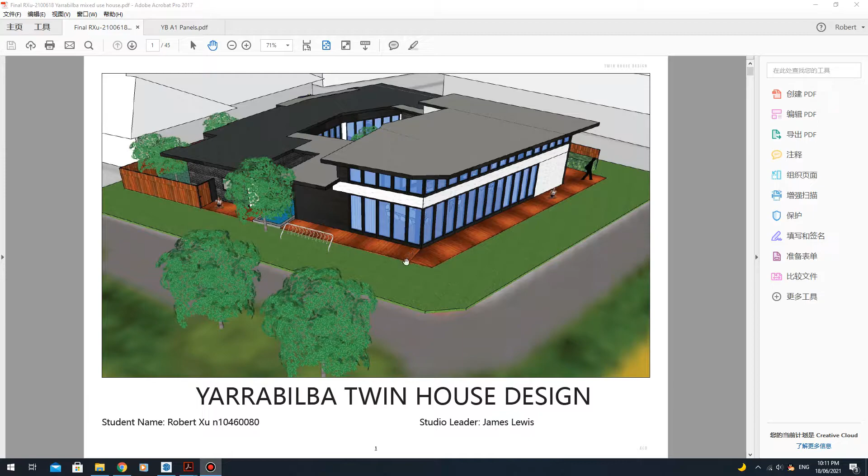Hello, James and Kirsty. Today I'm going to introduce the Yarrabilba twin house design.

Within the 15-minute city and circular economy, all the facilities and the community need to be self-sustainable, meeting community needs, products, waste and recycling circles, and personal needs for all different kinds of space for a multi-generation house. Everything needs to be located within the Yarrabilba community.

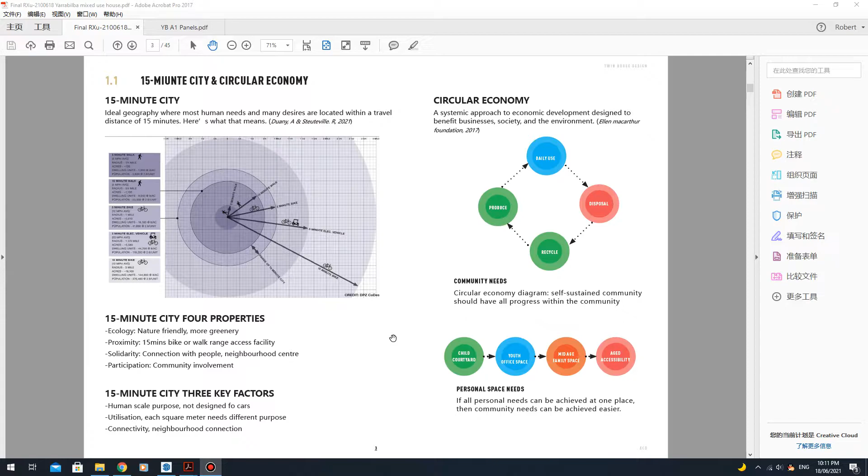The community spirit is interpreted as people from four directions: north, east, west and south. They all gather together at a meeting place to sing a song together. So with the Yarrabilba symbol and a place to meet, the place needs to feel like a home, with respect to the nature and Queensland Sun State.

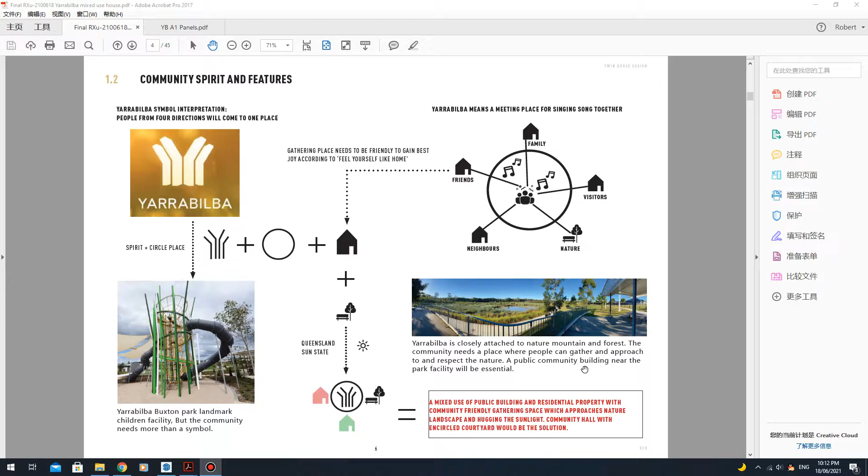It works out the building needs to be a mixed use of public building and residential property with a community-friendly gathering space which approaches the nature landscape and hugs the sunlight. In this case, the community hall with an encircled courtyard would be the best solution to respond to the 15-minute city and the circular economy.

The concept statement: Yarrabilba twin house, a mixed-use scheme that can provide affordable, large multifunction space with residential property, and a sunlight courtyard placed at the back to make the place feel like home comfort. That will help both community and residents achieve a unique work, live, play lifestyle within a self-sustained, social and environmentally friendly community.

So basically all the concept development is from the previous page, and the concept reference image is from the work, live, play lifestyle. In addition, for the sun courtyard, I've borrowed inspiration from Siheyuan, a symbolic Chinese traditional architecture. All those buildings actually encircle the courtyard, whether they are tenants, merchants, or the house owner itself, which is useful to understand the mixed use case.

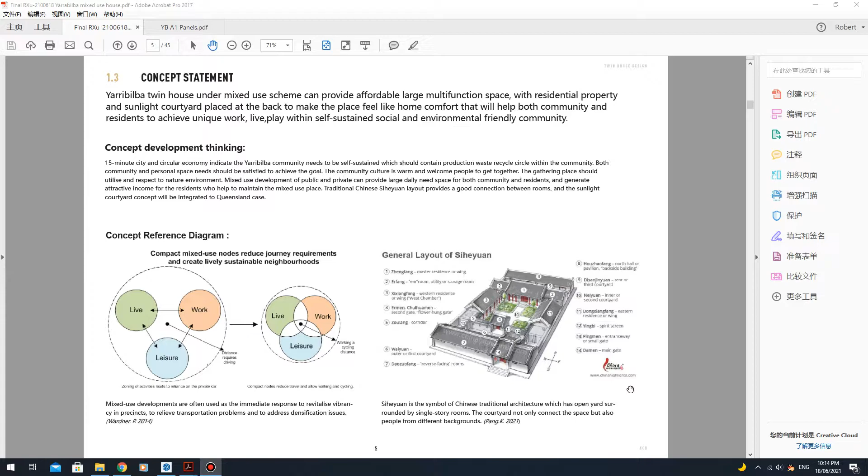The concept development, as you can see from the previous page, I have developed the private and public space with the courtyard in the center. Once it got the Yarrabilba symbol deformation following the Yarrabilba symbol, I balanced the public and private space to make it even, with the timber deck connecting both public and private space, although they have a defined border.

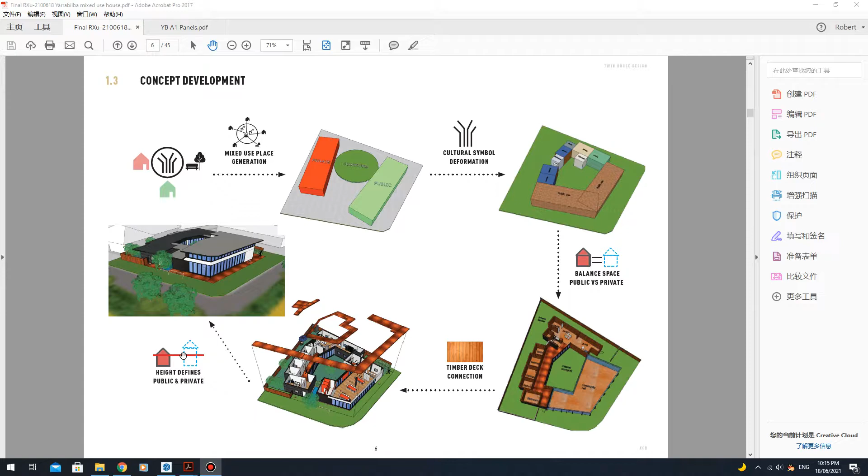In order to define the public space, the community hall is slightly higher by 1.5 meters than the private property, to show people that's the public place, that's where people should go.

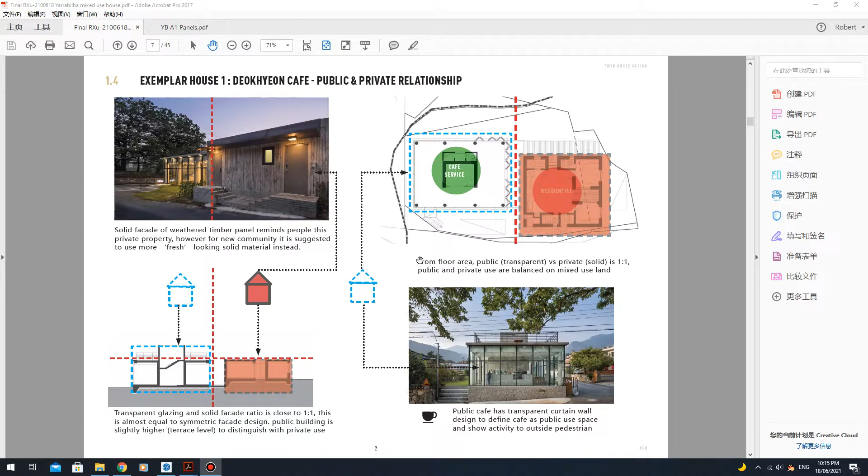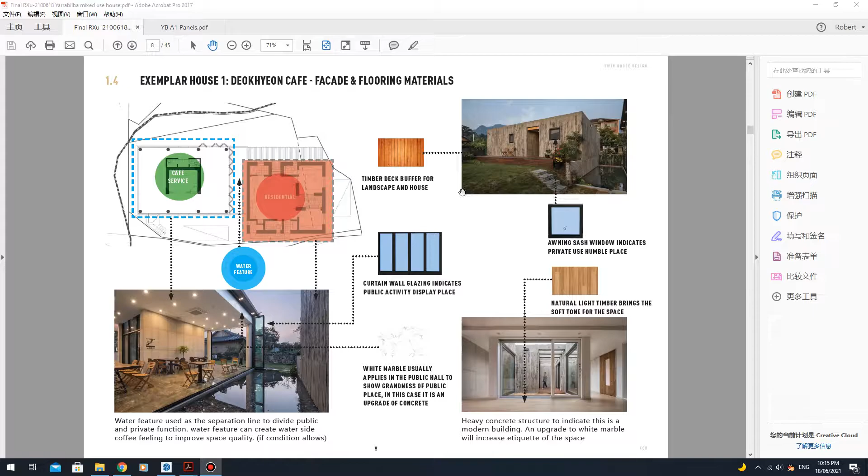So I've used three exemplars. The Deokhyeon Cafe shows that the private part is solid and the public part is curtain wall glazing, with the private and public floor plans having 50% equal floor areas. You can see the windows for public space and private space differ in size, and the timber decking, which I've applied under Queensland context.

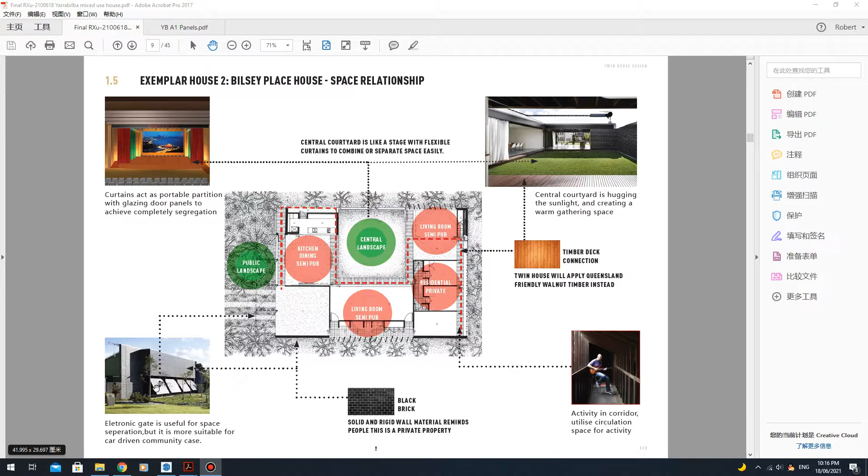The second one is the Bilsey Place House, showing the relationship. As you can see, the whole big space is connected and circulated through the timber deck, and those places use curtains and partitions to separate or join space to form a giant place. The circulation space can be used for music, leisure activities, sliding electronic gates, which is more helpful for a car-driven community, which is not the case for Yarrabilba.

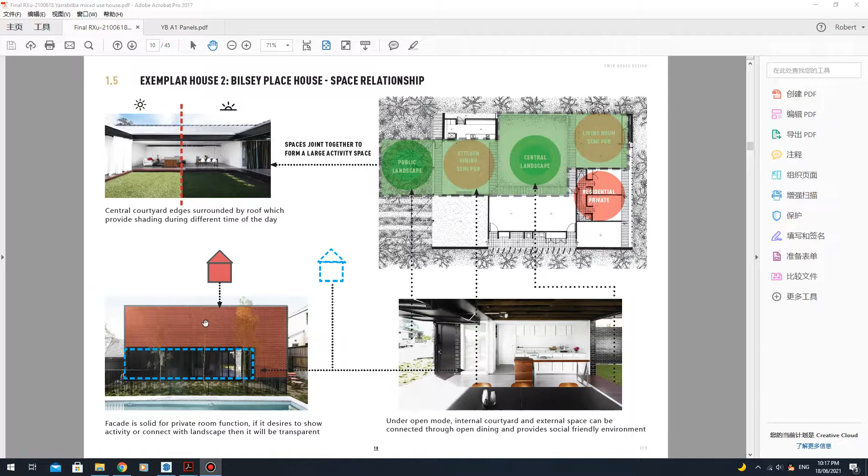For the sun courtyard, the shading structure from the building will provide shading during different times of the day. Once the door opens, this can connect the external space, residential place, and the internal courtyard into one space. The spaces connecting to the landscape will be transparent, and the private part, which doesn't want people to see, will be the solid part.

For the community functions, I've applied the Curra Community Hall. As you can see, people still use the timber decks as a buffer between the external landscape and internal space. It's also timber flooring, which is elder-friendly, and the timber flooring will be slip-treated so no one falls over. As you can see, the entry is pretty high, and once it gets to the internal space, it gradually gets lower.

And the view for the external place, once it's opened up, it will be getting a view to the public landscape. For the Yarrabilba case, this will be the Neumann Park.

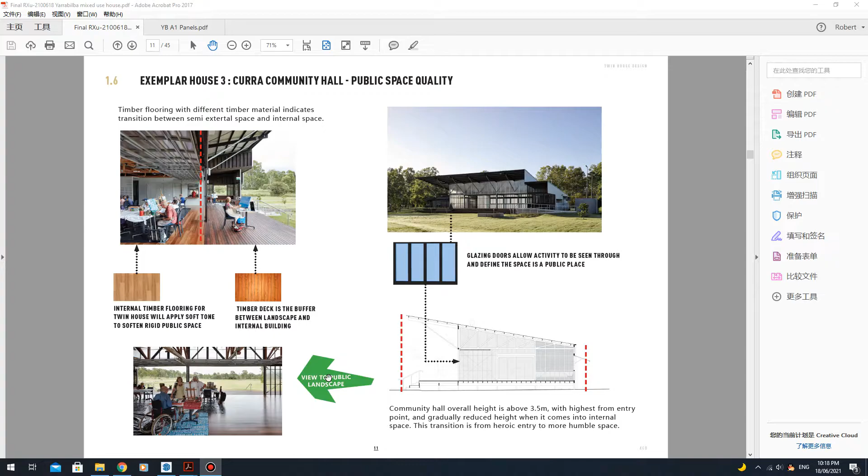The public functions, as you can see, the community hall is pretty much a multi-function hall. It can be used for education, entertainment, work use, conference, shared office, functions, weddings, parties, special events, exchange marketing.

Community use exercise. For the Yarrabilba community, it's got a circular economy where people grow food in their backyard. If they have excess food, or want food from other families, at the weekend the community hall in the twin house will open for residents to exchange stock. This will complete the circle of the circular economy.

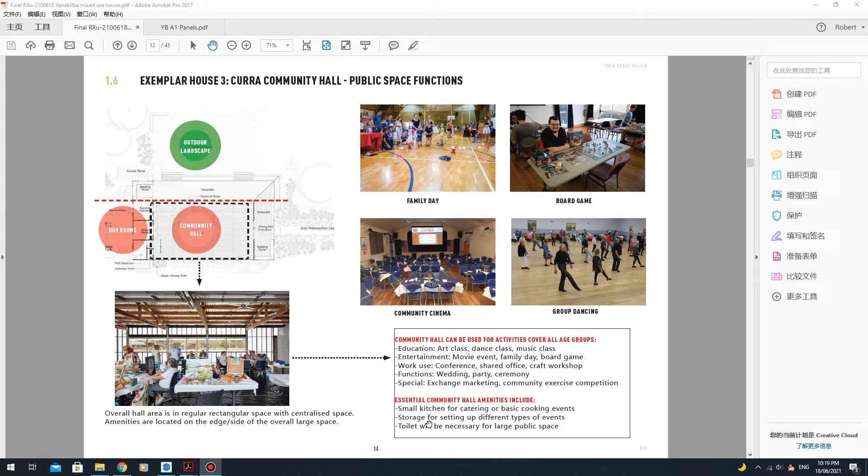And the basic needs for the community hall, a kitchen and storage, that will be helpful, and the toilets definitely for large events where people need to solve their problem.

The design analysis, as you can see, the Yarrabilba community got small covered place, small enclosed space, large uncovered space. But for the large enclosed space, they've got a place in the community, but it is not really price friendly, because it will cost like $200 per hour from the local hotels.

So the Yarrabilba Twin House Community Hall will be the community-dominated use and with reasonable price as well.

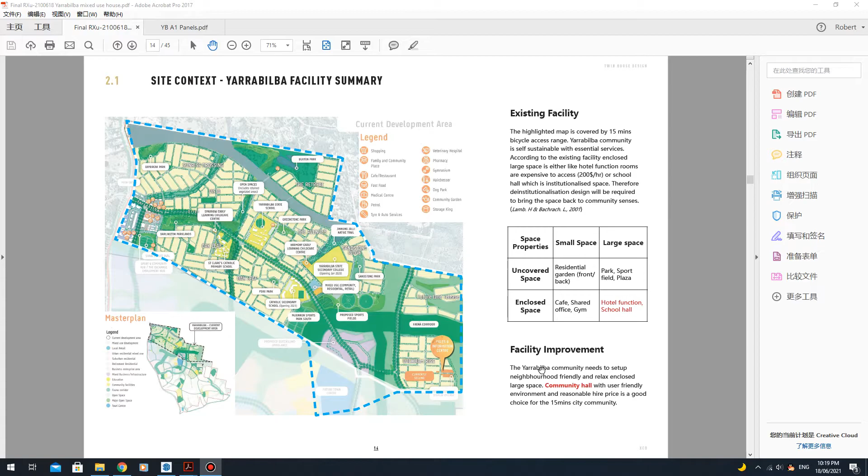As you can see, the 15 minute range, all these blue lines will cover the foot range, and the big one will be the bicycle one. Basically, the all current Yarrabilba community will be covered in the 15 minute bike range.

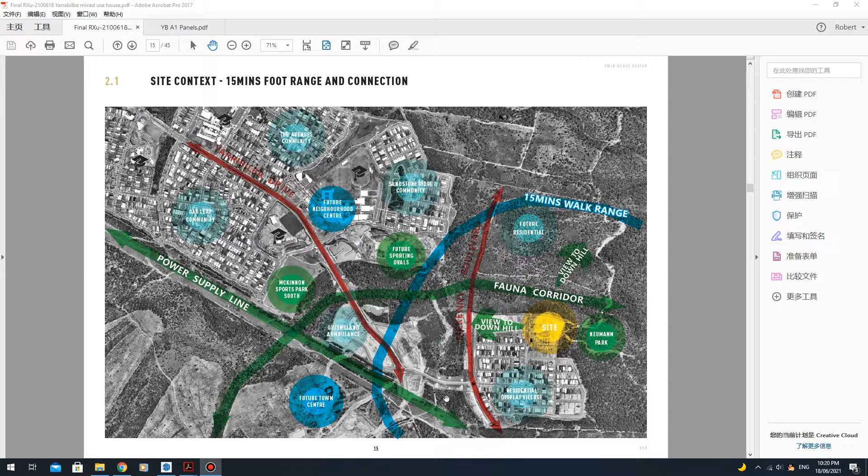And that's the site views. And definitely the landscape view to the Neumann Park should be also the one for the public as well, so that's where the public one should be located.

I've tried three options, but which will be self-explanatory on my design brief.

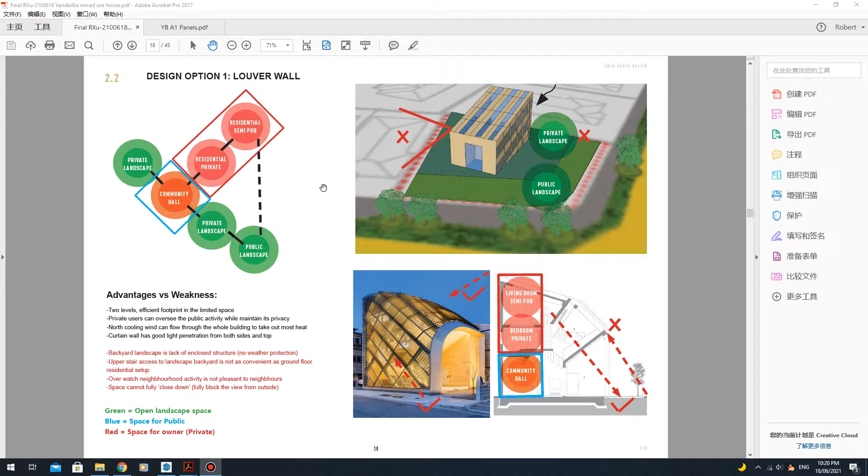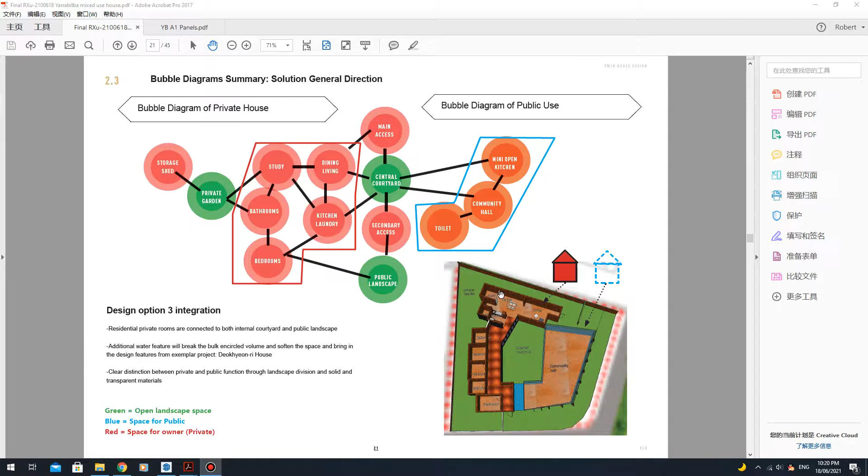So after I work out the relationship, pretty much the public landscape, and also the private, and another private landscape for the residential users if they want to get a retreat and keep away from the noise of the public.

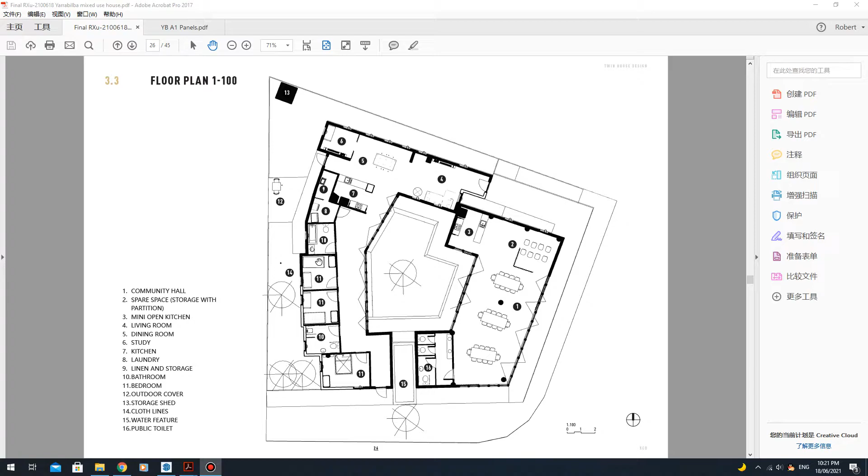So as you can see my site plan, and that's the roof plan where the roof materials are slightly different to distinguish between the two spaces. And the floor plan is pretty much self-explanatory, and that's all the flooring materials.

As you can see, I used soft oak timber for the internal and also the community hall space, and the timber decking connects all the exterior and interior space.

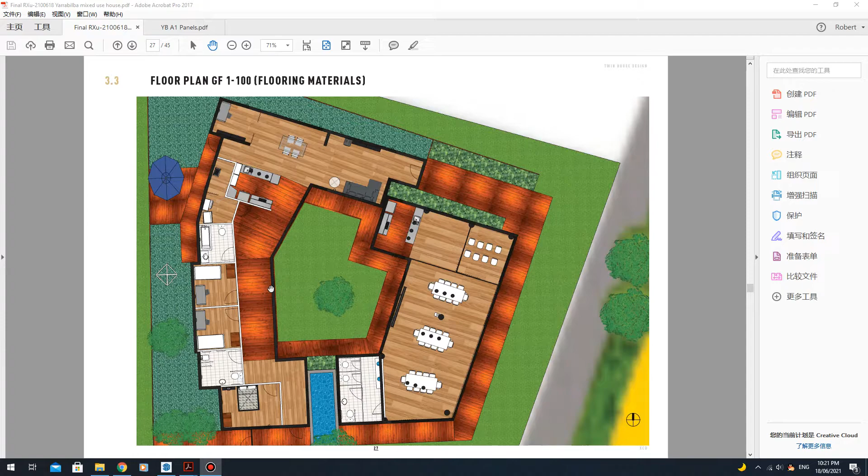As you can see, the circulation when residents come home: they drop their stuff in the bedroom, take a shower, and go to the kitchen, cook a dinner, and have dinner while watching the internal courtyard view.

If they want to have some home theater late at night where no one uses the community hall, then the community hall will be a home entertainment place for them.

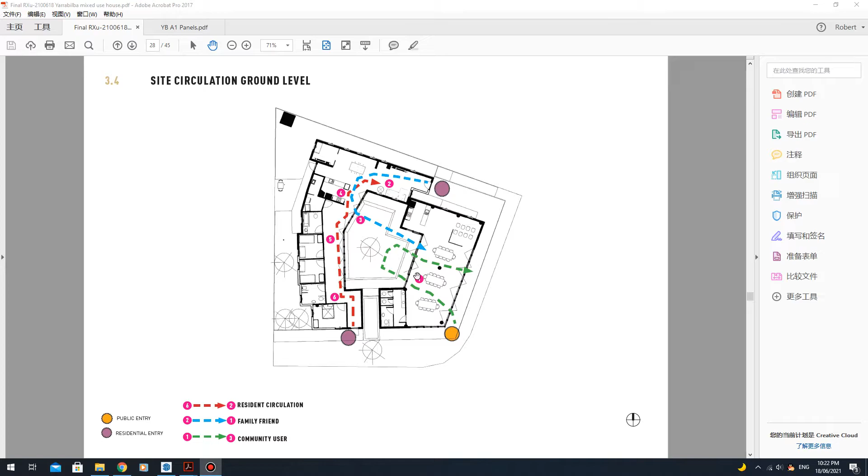As you can see, the community hall has 4 modes. Daily use mode, which is for all different activities during the day. Completely family, large events for the residents, which is the benefit.

And also neighborhood friendly, if you want to invite the neighbors you are familiar with, so they can access part of your family space. And if you want to open up a large community space, that's for like a stock exchange, then you can just open up and close part of the internal road, which will not disturb the public use as well.

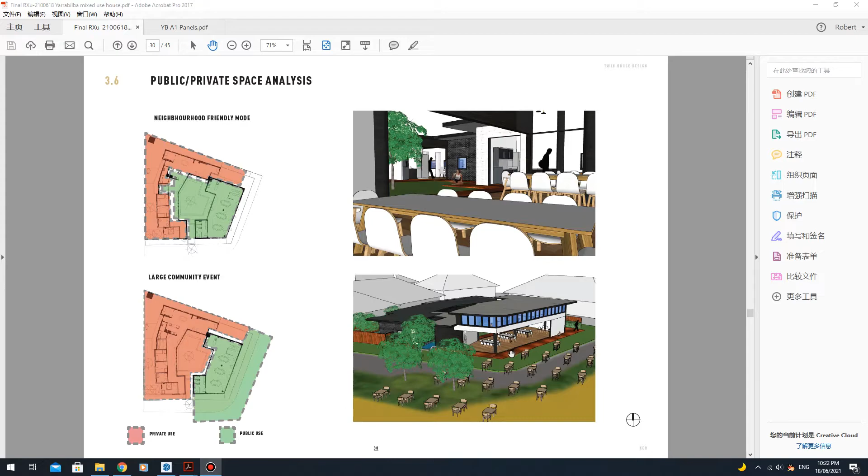So external perspective view, and that's the facade material: black brick from the black house, timber flooring deck, curtain wall, the dark aluminium. This is the transition between the black brick wall and the public space.

So this one is the toilet, which still indicates like an undesired place. You don't want to attract people to come there.

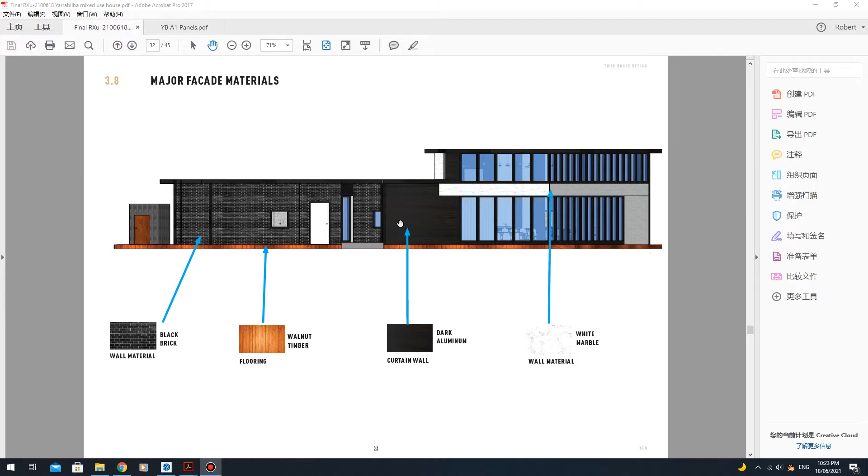And all the sections. Internal floor plan where you can get the projector.

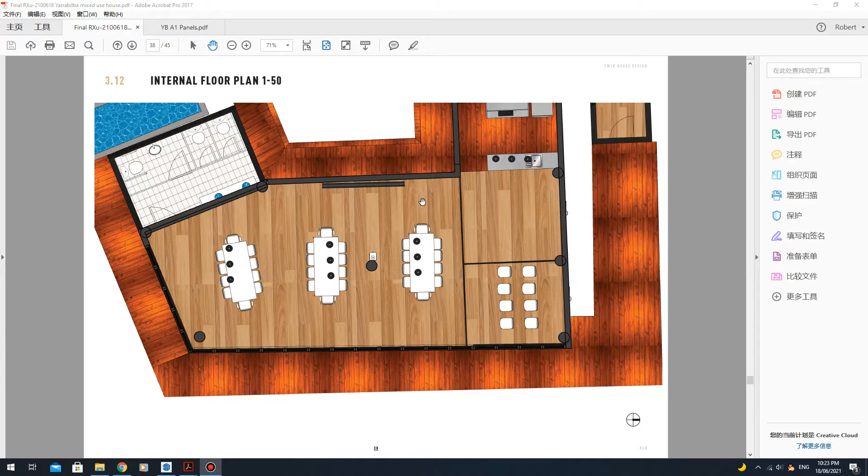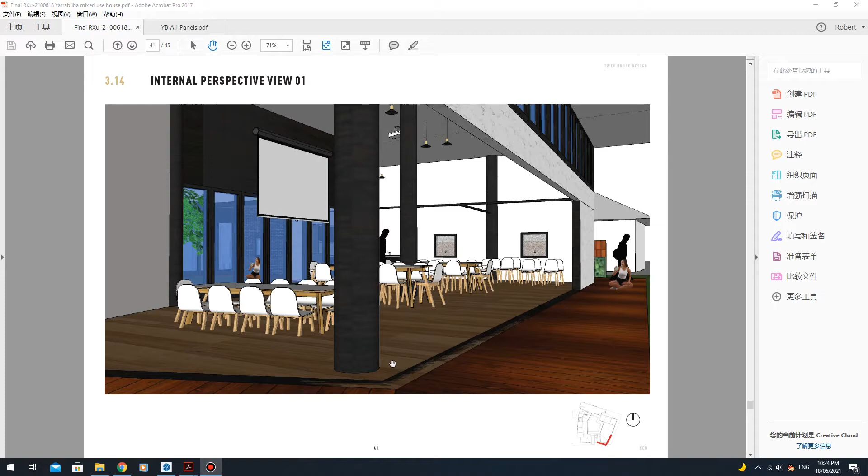So where you're standing on the deck, if you want to have a look at the community, that's the view. The courtyard, once it's open, standing at the kitchen.

So all the other views are pretty self-explanatory. If you want to say hello to your neighbors, you can stand in your premises and do a big greeting, it's pretty casual. If you want to invite them closer, there's plenty of space for you to use as well. And a pretty harmonious space once you enter the residential entry.

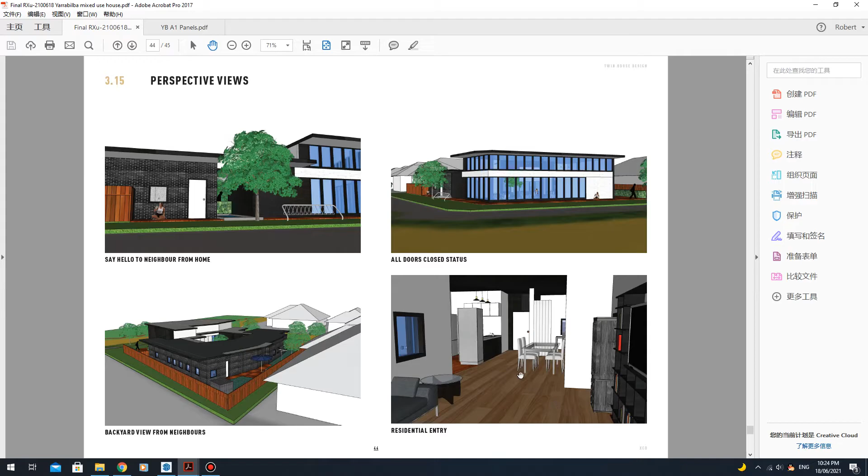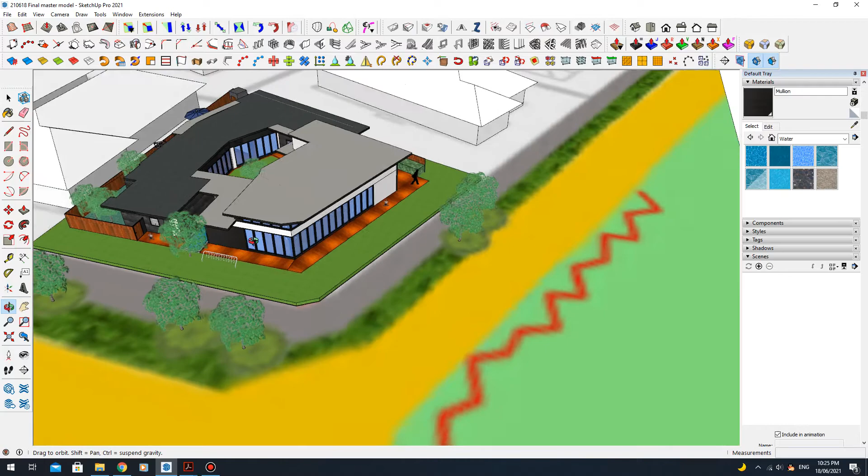So for now, I'll show you running through around the model for you, so you will get a bit better understanding of the space. So literally I got some buffers, almost like should be almost 4 meters. So this will actually get the maximum use of the space.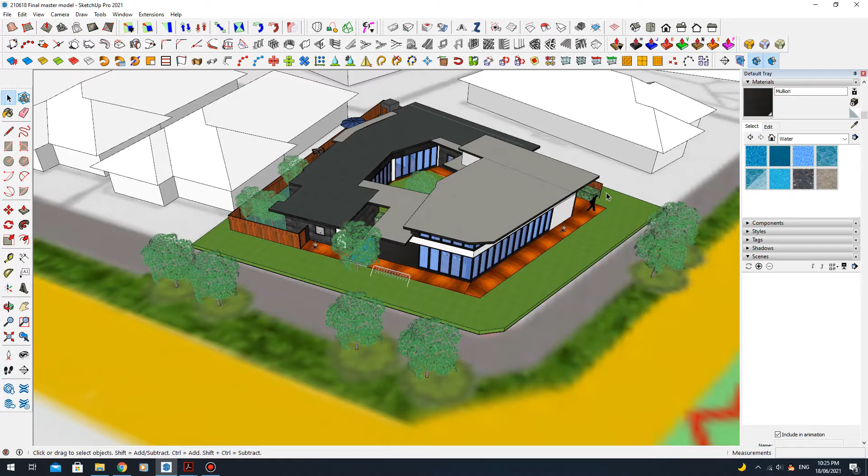So the backyard, which is slightly a bit closer as well, will be around probably 2 meters to the other property boundaries.

So you also got the bicycle racks, because this is the 15 minute bicycle drive community. So you can park your bikes around here.

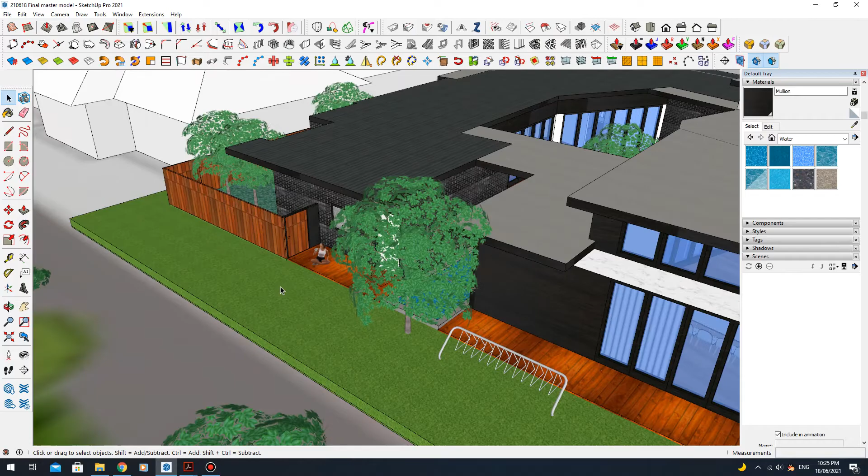So where people want to enter, they can enter from the public entry. The residential one, as you can see, stops people coming in, and also has a tree to cover a bit to the internal courtyard to get some sort of privacy. But if they want even more privacy, they can install curtains down here, so that will be really easy to install and affordable as well.

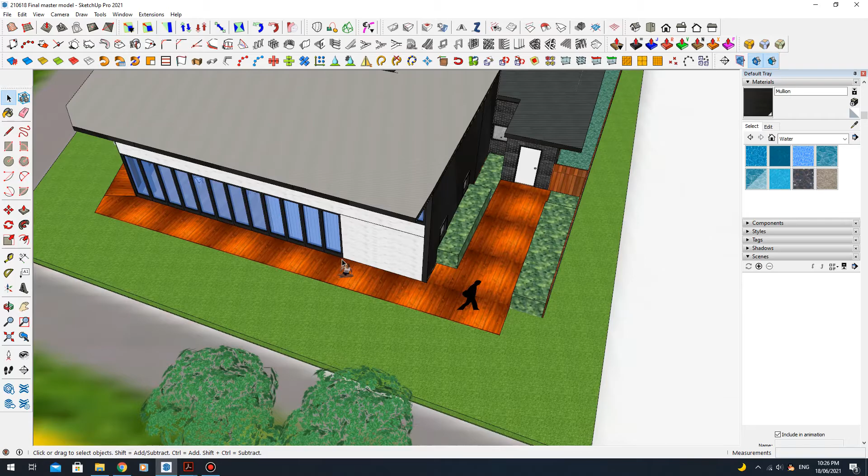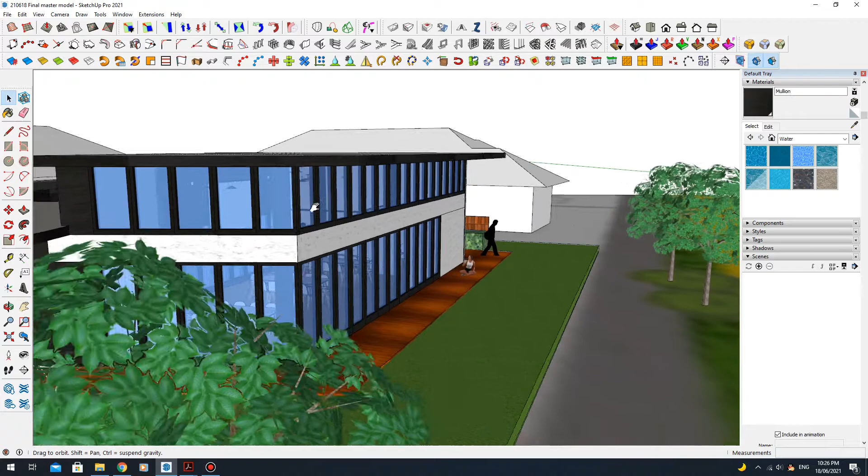So that's another residential entry. So for all those undesired places, I'll use mosaic glasses and transparent ones, the 4.5 meter high community hall, which will get pretty good light penetration, especially early in the morning from the east sun.

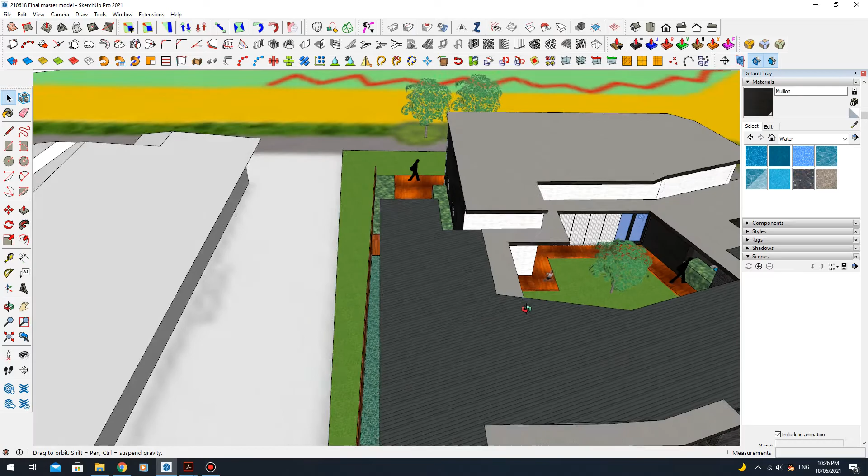And this is the view towards Newman Park. So they got a retaining wall down here as well. So for now, that's the internal courtyard, and a bit of a back retreat space, clothes hangers, and also a shed as well.

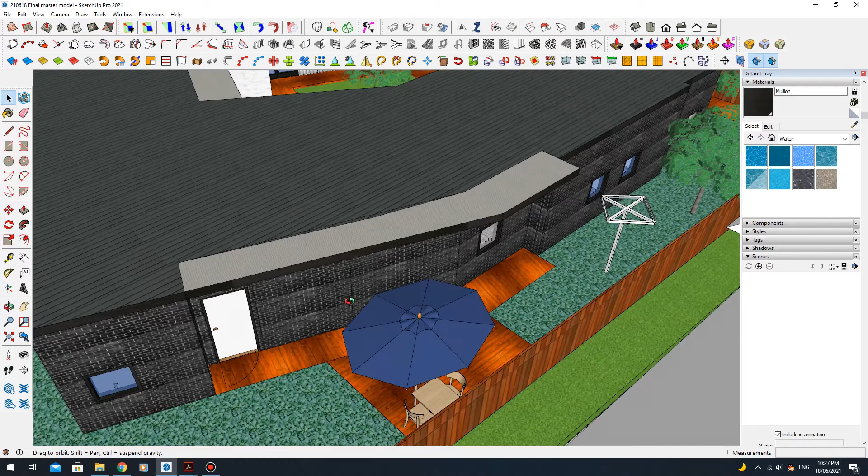The study will get a bit of a view of the landscape down here, which needs the landscape consultants to get a bit more modifications. All those back circulation areas will get timber decking for the external area. And this also has the entry from the front door to enter the backyard, which is easier for them to get the rubbish bin out to the street.

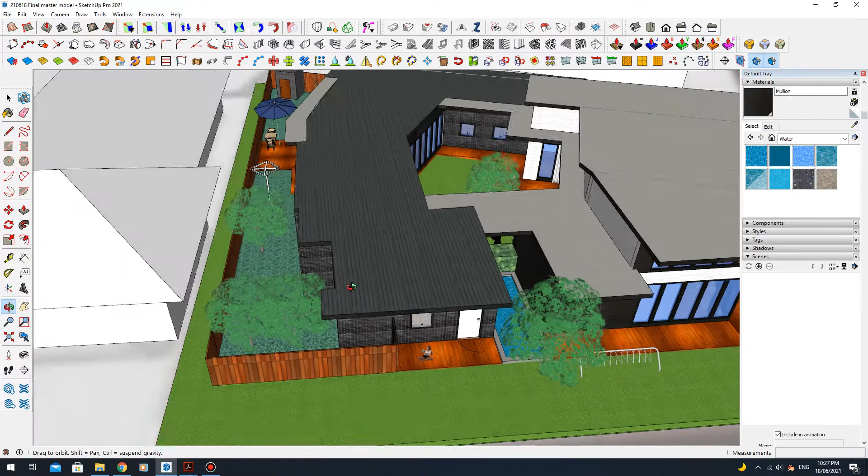Now I'll open up the internal space. I actually got 2 bathrooms. Those bathrooms are actually accessible for disabled persons, so definitely this house is for multi-generational living.

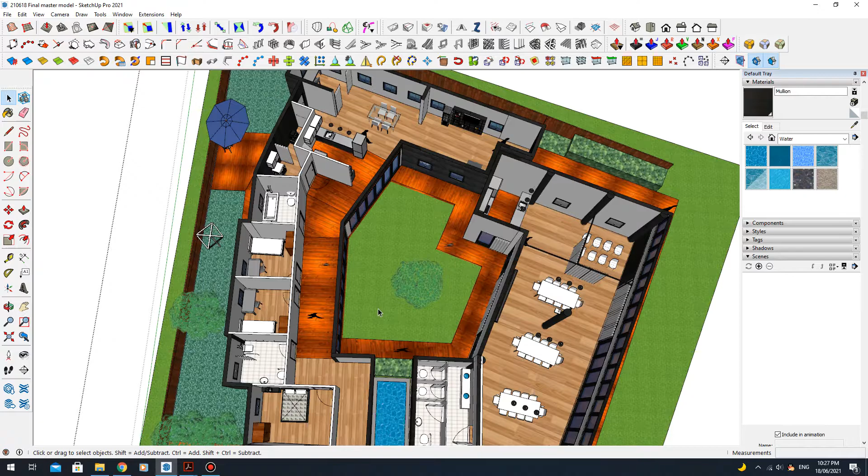They got a courtyard for the kids, and they also got a working space for the youth, and for the family there's plenty. And for the aging ones, all those timber decks got some kind of slope to the ground floor, so the wheelchair can easily access.

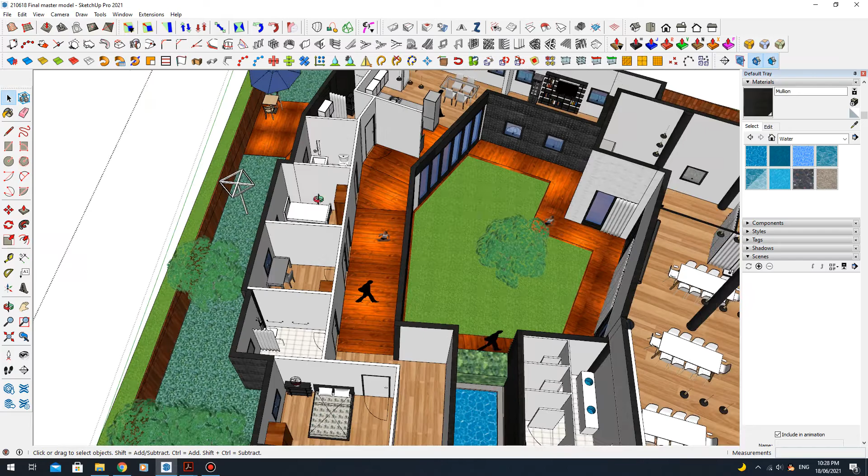All the kitchens got task lighting, which is the highest standard from the Livable Housing guidelines, and the bedroom is platinum standard as well.

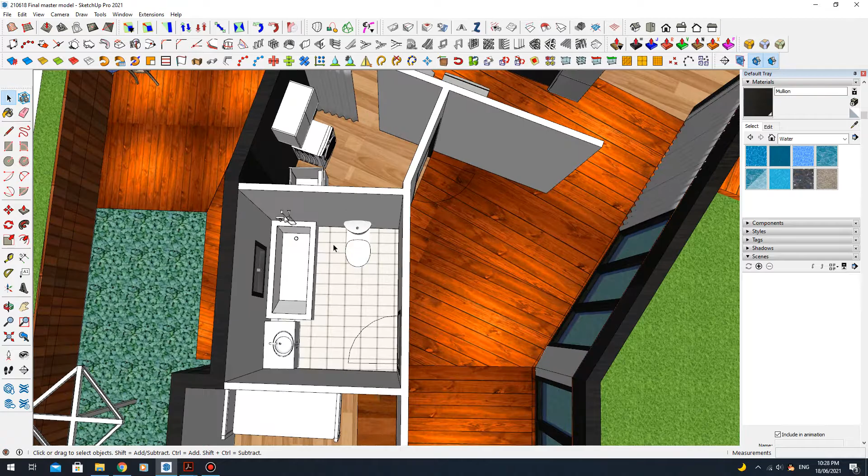Study room, I put it for a single bed, which is a pretty standard 3x3 one. They also got a second bathroom if they want to use for showers and bath, a combined one to save space. And also you got the laundry, general storage, and the living room, which is at the entry.

If you want to have a look at the kids, you can just stand up from the sofa, the lounge, and have a look at the internal courtyard.

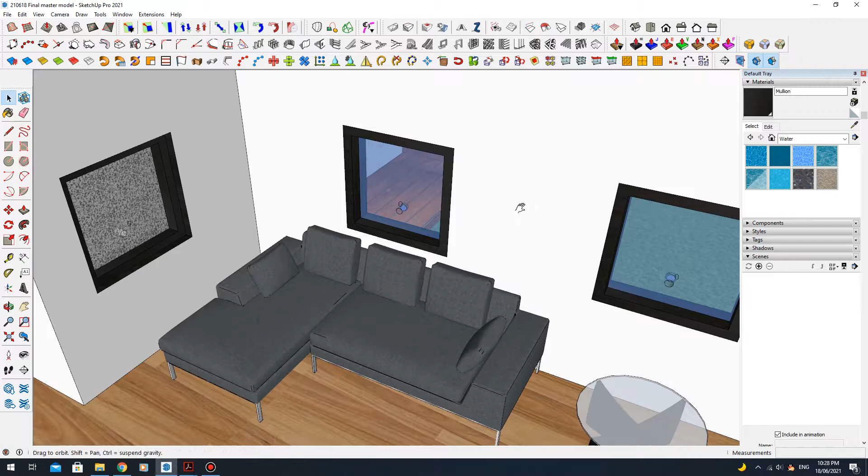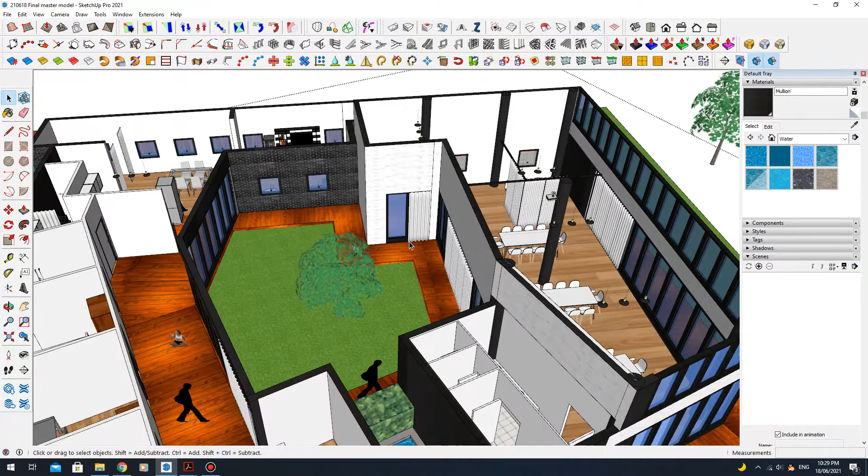Those glazing doors accompanied with a curtain, so it's a good combination of open and close. This needs mathematicians to work out how many options they got available for both sides of those curtain walls.

And for the public space, this corner can be used for the community hall or used as storage for furniture. So they got the rails for the curtains.

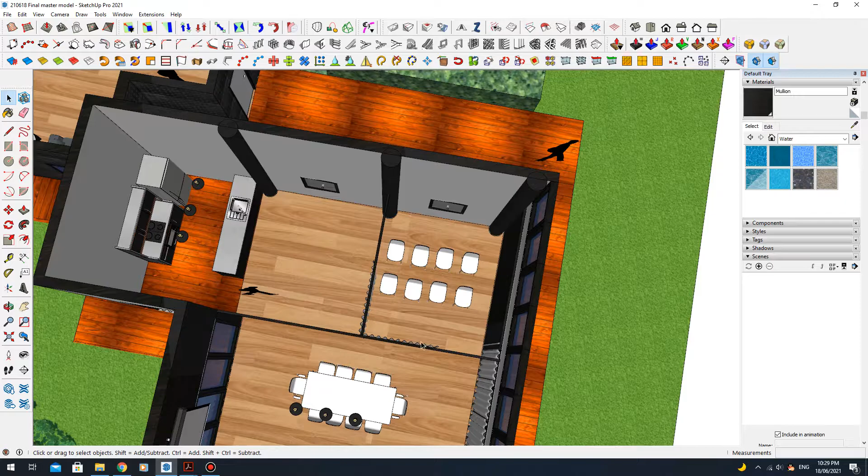Columns have been installed according to the structural engineer's advice, and all those lightings are above the table to get a bit of task lighting. A mini kitchen, which will be good for caterings.

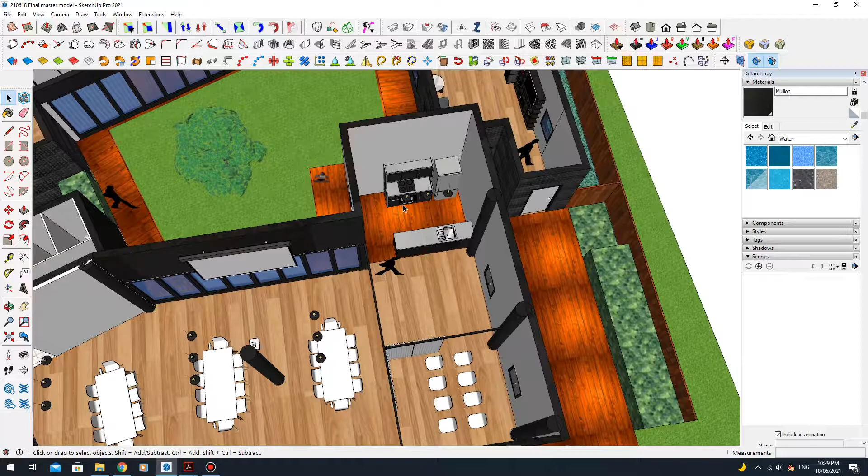They don't usually do cooking down here, but they can definitely do the catering. If it's not enough, the family kitchen will also provide some kind of help, but usually it won't be needed.